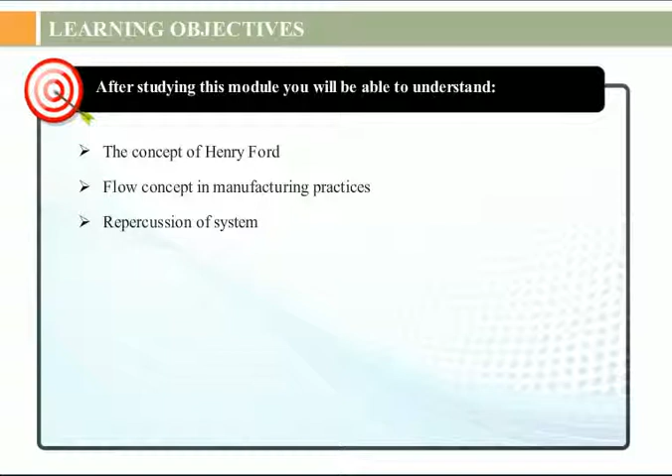The manufacturing industry has been shaped by two great thinkers, Henry Ford and Taiichi Ohno. Henry Ford revolutionized the industry by introducing the concept of flow, and Taiichi Ohno took Henry Ford's concept and adapted it to the Toyota production system that made the whole world change its view of inventory from asset to liability. The key starting point for Ford was to have an effective production.

We must concentrate on improving the overall flow of the product through the production system. And he focused so heavily on it that by 1926, to manufacture a car from mining of the iron ore to a fully finished assembled car, which composed of 5,000 parts, put onto the train for dispatch, took only 82 hours. That means from iron ore being brought to the factory and all the processes put together, to the car being put onto the trailer or the train for dispatch, took only 82 hours.

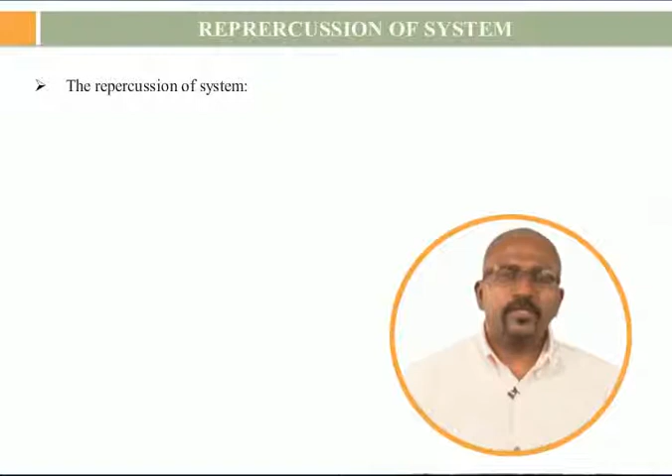If the space is limited, the worker will stop producing when the space gets full. When the worker stops and you're measuring efficiencies, your efficiencies have gone down. And this would not be a good thing to do, because it is deemed in our mind that the more a worker works on a workstation or on a machine, the less cost and more efficient my operations are.

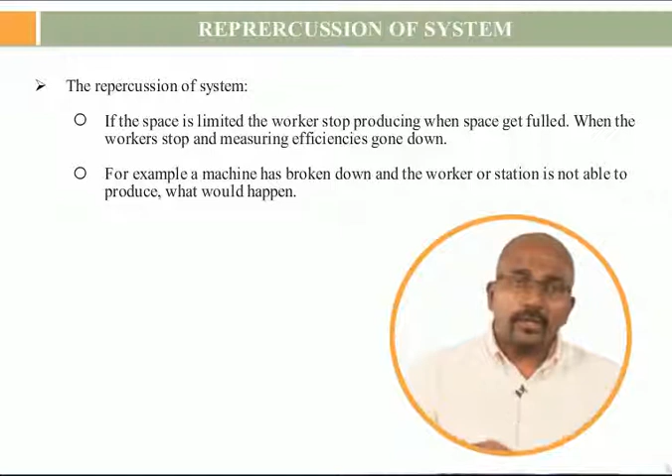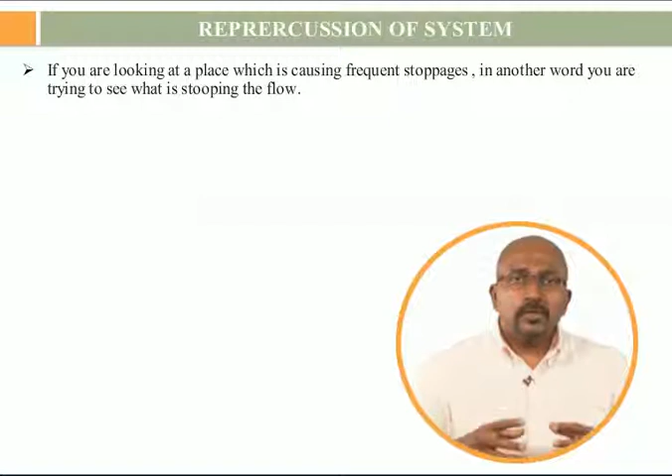However, there's another big thing that comes out. For example, a machine has broken down and the worker or the station is not able to produce. What would happen? Everything downstream would dry up. This would allow you to focus also on a point so that such stoppages don't take place. What does one mean by this? If you are looking at a place which is causing frequent stoppages, in other words, you are trying to see what is stopping the flow. That means that you are looking at ways and methods to balance the flow. And where to look appears very quickly in front of you, because that is the place which is stopping the flow of material. Or beyond that place, there's less material in the pipeline.

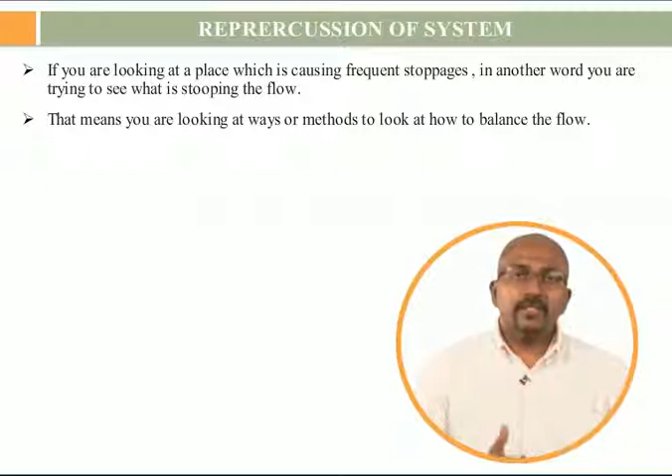It not only helped Ford look at places which are disrupting flow, but also look at places where the capacity constraint was there or the work distribution was not done properly, which increased the time required for a worker to work on the material. That means it was very easy for him, by reducing space, to find out where to balance the flow.

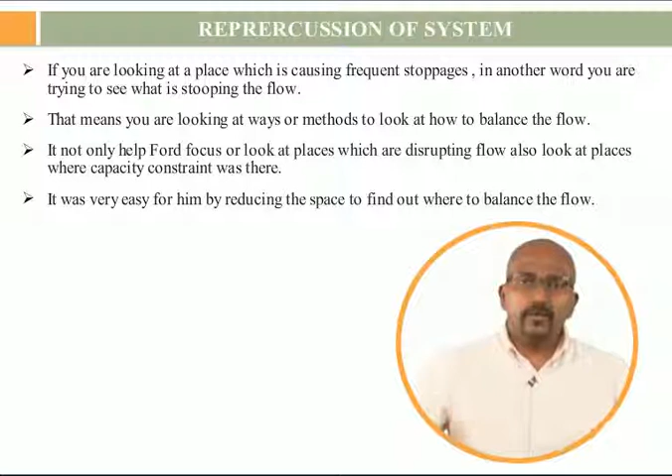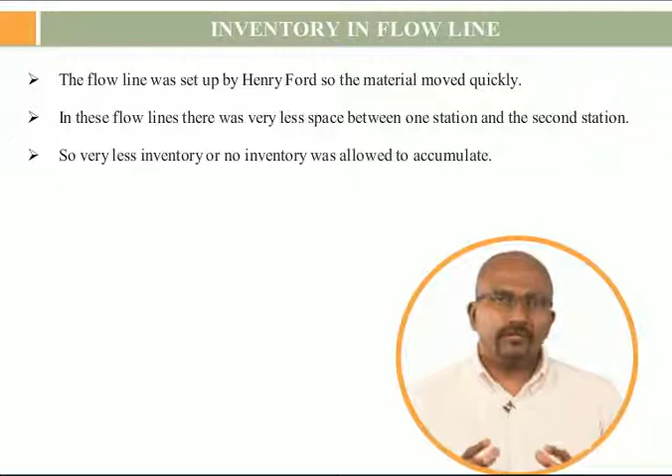So let's recap. The flow lines were set up by Henry Ford, so the material moved quickly. In these flow lines, there was very little space between one station and the second station. So very little or no inventory was allowed to accumulate. As these flow lines improved, the material movement system was taken over by the conveyor belt, and over a period of time, the modern assembly line was born.

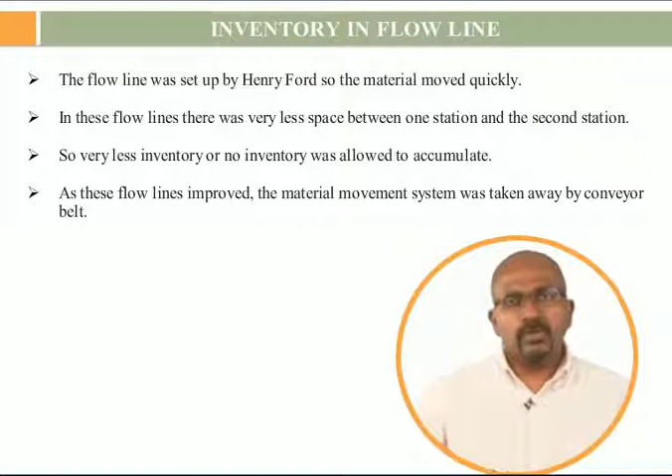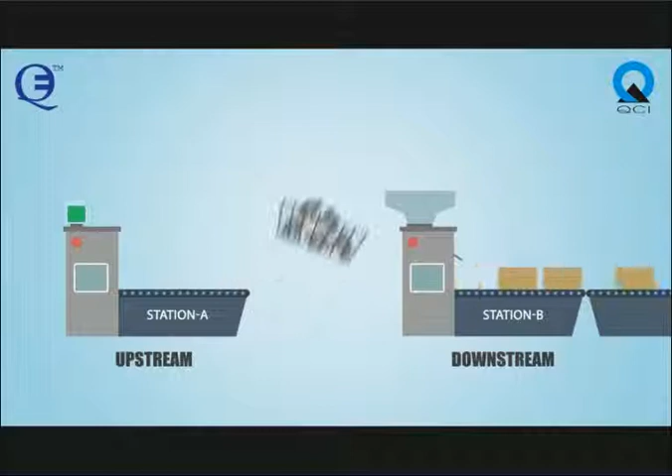Let's take a step back and think what was happening. The reason we allow inventory to pile up between two stations is to make them independent of each other. If this is upstream and this is downstream, and there is very little inventory, if the upstream manufacturing station goes down, the downstream manufacturing station will consume this inventory in between and then go down. So there is a time difference between the upstream and the downstream manufacturing station. The higher the inventory, the more the downstream operations are insulated from disruptions of upstream operations.

And if our operations keep working, we consider this operation to be efficient, and if it doesn't work, it is losing its efficiency. The reason why we make them independent is a conventional belief that this increases efficiency of the system, of the operations. What Ford did, he didn't allow this inventory to pile up, and the mechanism was to reduce space. You don't give enough space for the inventory to pile up, and as he kept reducing the space, the inventory between two stations kept going down. Now, if this inventory kept going down, that means he forced the downstream operation to be dependent on the upstream operation.